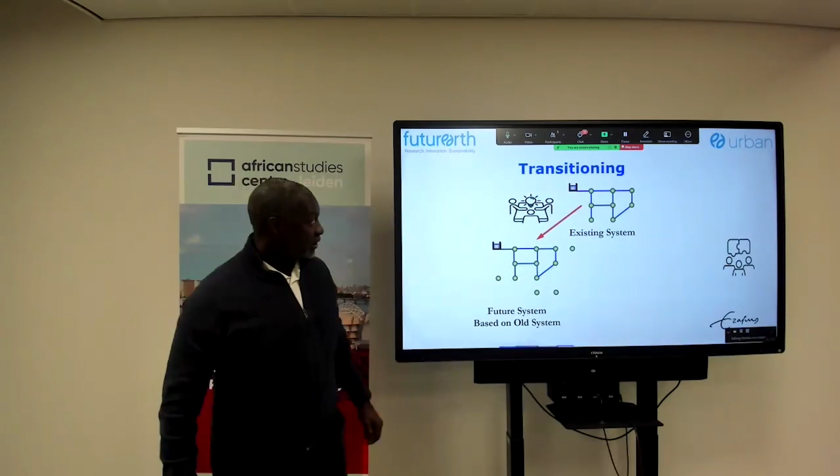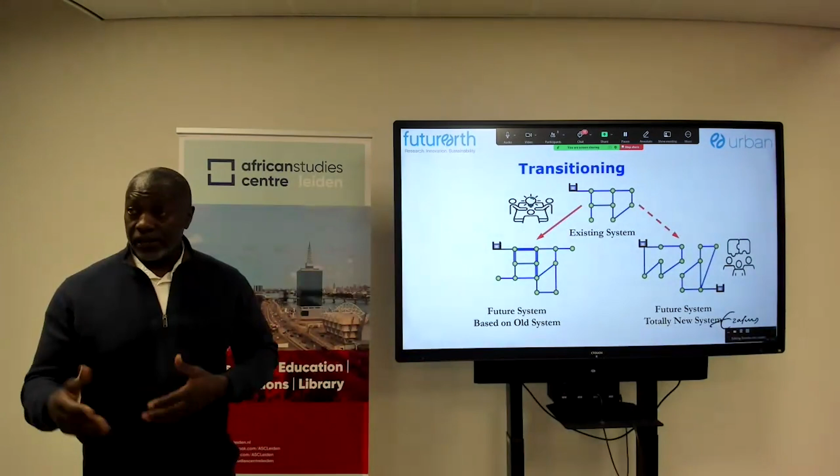So it's highly centralized, but you can continue doing that in the future by building on the existing old system, but we know that it's not happening at the pace that we need. Or you could break the system a little bit and decentralize. It means you localize the responses, you localize the opportunities, and you start working around the materialities that could be changed or even substituted.

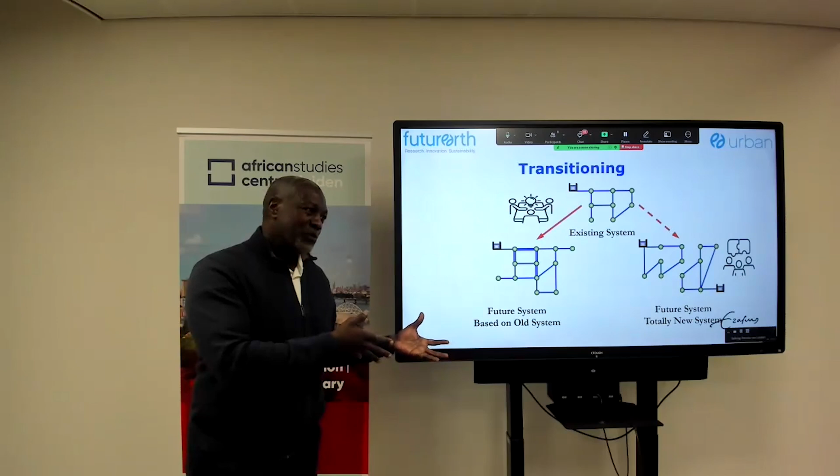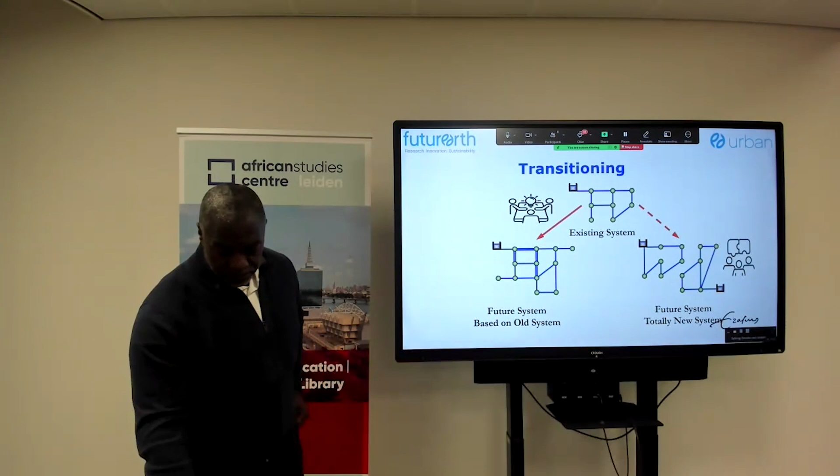So in some situations, there's a possibility to move away from concrete and steel in terms of sewage treatment, to nature-based, wetland-based management of waste. If you have a manageable system that is not highly centralized, then those possibilities can be explored, the feasibility analysis can be conducted, and then the investment opportunities could be identified. So future systems need to be looking like that. But it doesn't mean only that.

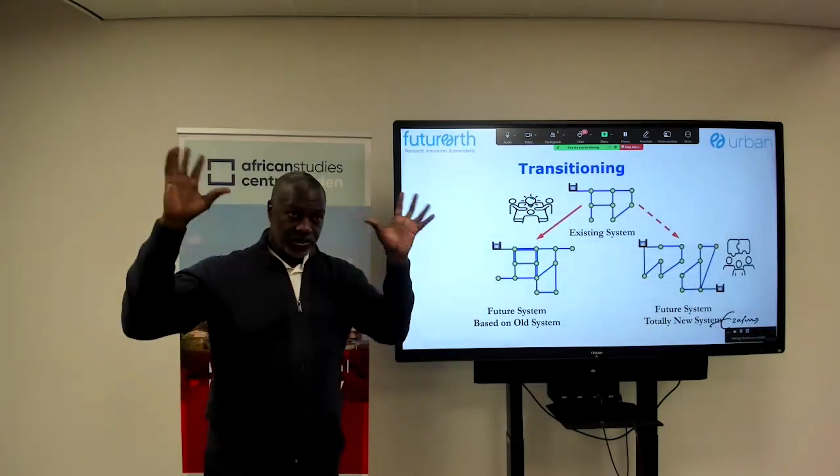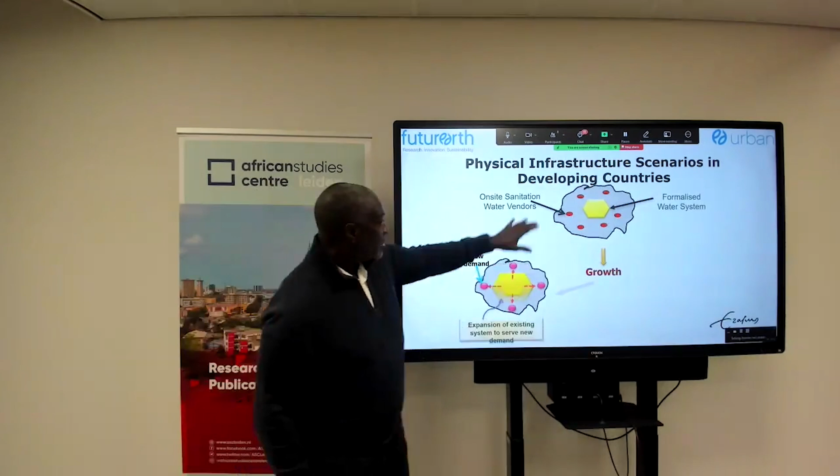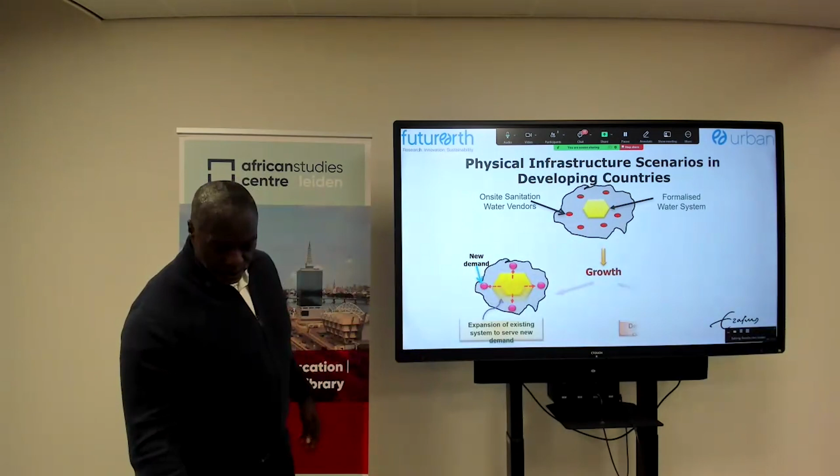There could also be situations in old, rapidly established and rapidly growing cities. This is still relevant, but if we piggybacked with that in the expansion areas, which is urban, then it might make sense to integrate through that element. Other systems could also be thought of this way. So you have on-site sanitation vendors, formalized water systems, but with the growth happening beyond the jurisdictions, do you expand on existing systems or create subsystems around it and eventually network them? All these are scenarios.

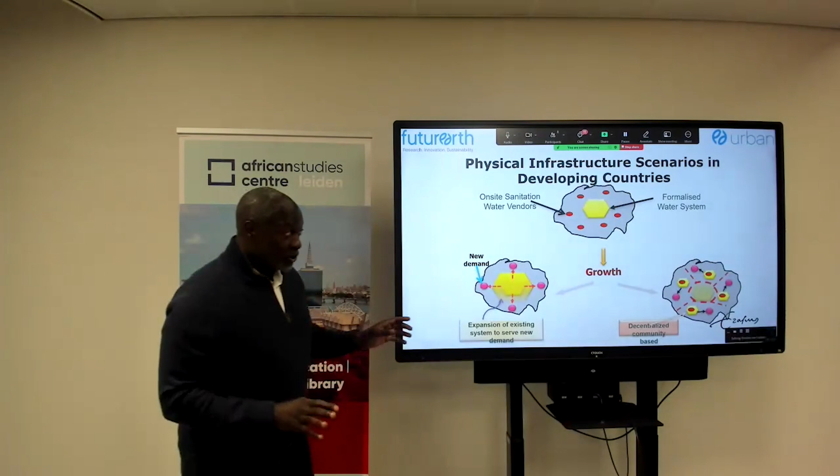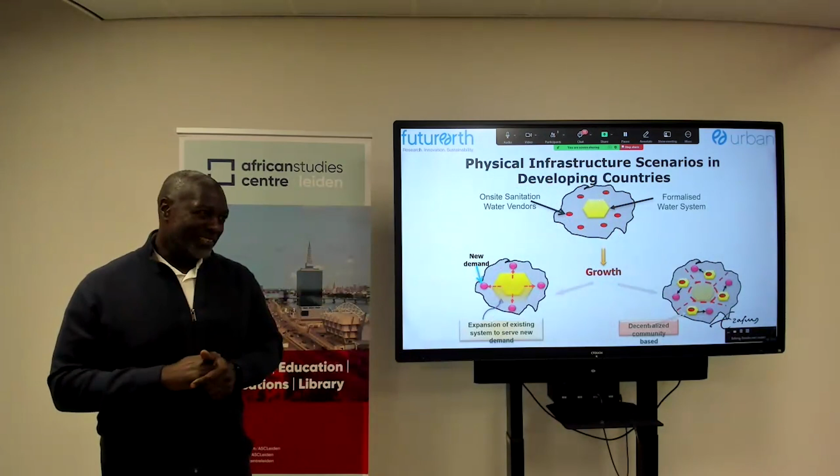It doesn't mean it should be worked out this way. In some situations, you might need only 2 of these and not 4 or 5, and that depends on the context. That pushes back on the toolbox I talked about earlier, because the toolbox pushes this: expand on existing system or design new systems. Now the word in sanitation is decentralized sanitation system, but they're still highly networked and huge, requiring huge investments as well. So that is an example.

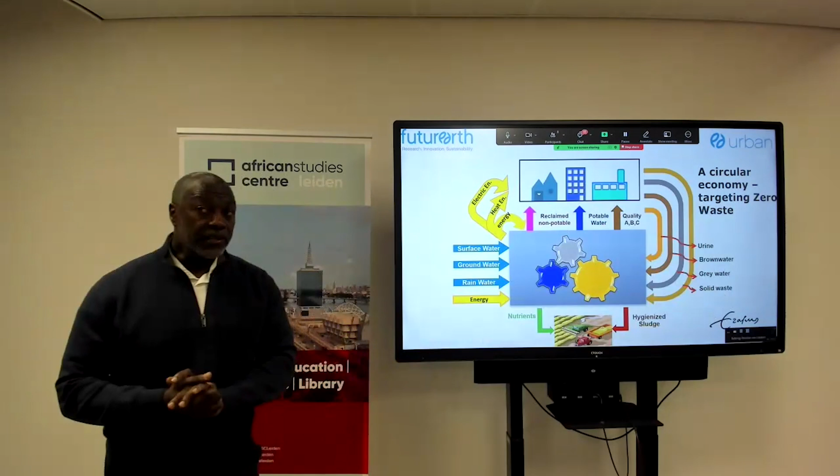There is a lot of opportunity related to the circular economy, by tapping materials from the waste and other opportunities - surface water, groundwater, rainwater, or energy - and then you reclaim and recycle those materials, whether solid or liquid, and they come back into the system, sometimes as hygienized sludge that could be utilized for agricultural production. So many examples, but again, they're disparate.

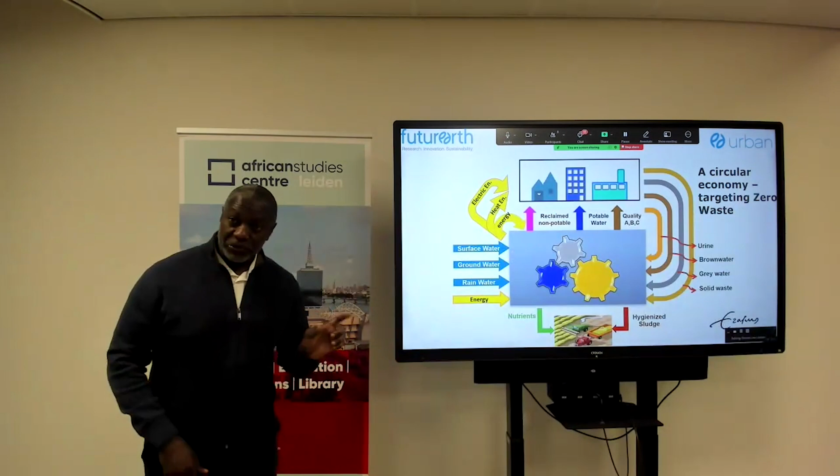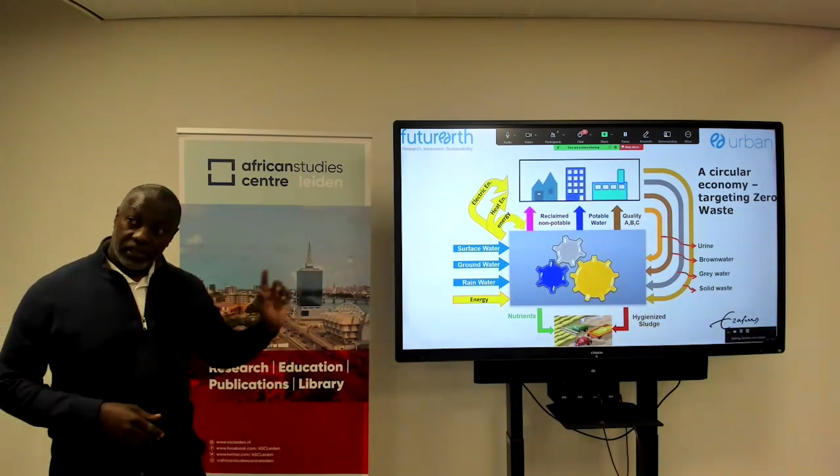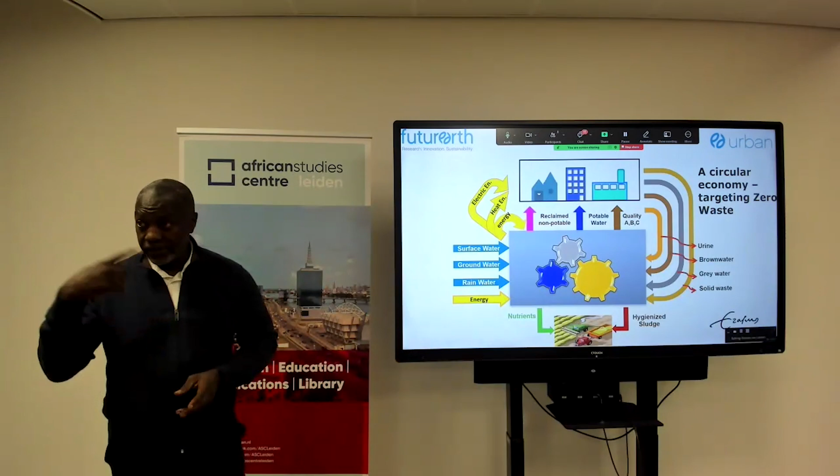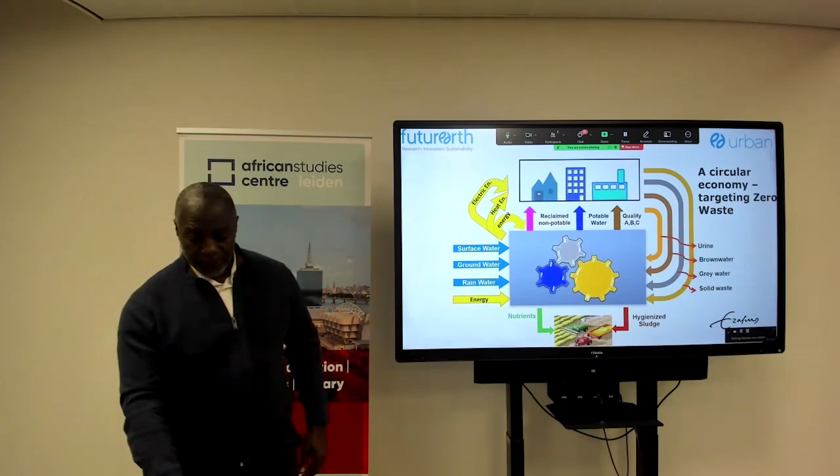If you go to Durban, they are doing the capture of nutrients from sewage coming off the pipeline network. In Kampala, they are now testing - I think they've done about 4 or 5 tests - tapping beneath the landfill to capture methane, which unfortunately a couple of months ago partly collapsed and killed people. So that has stalled a little bit, but there's been discussion about how to capture the methane from this landfill and utilize it for something else, maybe generation of electricity uploaded onto the centralized grid. So there are all these opportunities that have not been explored, yet they could offer a lot of economic opportunities, possibilities for coverage, improved coverage, affordability, and access.

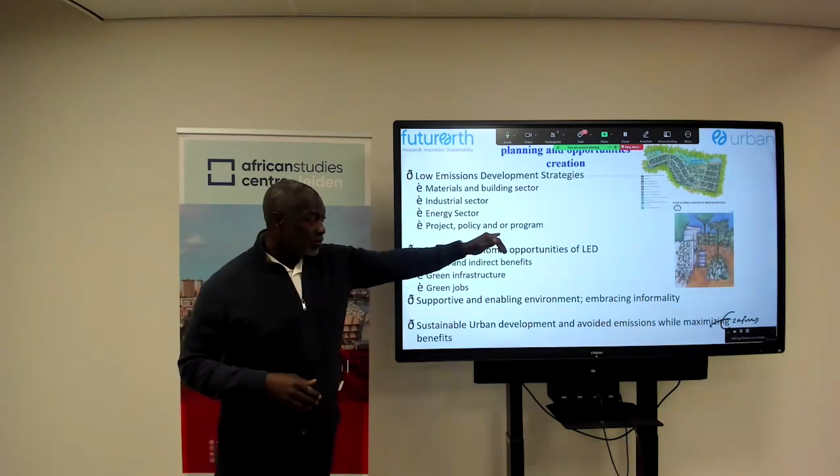And if you're going to develop the cities or urban areas, then we have to think low emissions development, and again, a repetition of the 4 sectors that require transition: energy, materials, industry, but also the project, policy, or program. Do you go for project or policy or program? And the projectization has been critiqued. It looks like there has to be a program in the urban areas in order to do that.

There's been a trial in several cities in several countries. Kenya is a good example that comes to mind right now, where the new structure of decentralization of governance has created the whole county government for the city, and the boundaries were adjusted a little bit, to allow planning on that urban area in that context, including a little bit of the peri-urban areas. So that gives room to think about integrated systems.

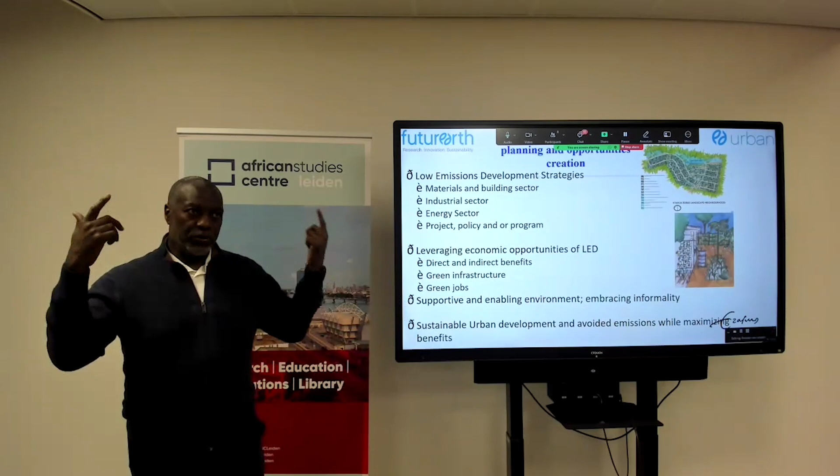So the rivers I talked about used to go beyond the Nairobi City Council. But now, because they are part of the county, you can do upstream, downstream restoration. Therefore, focusing on only a few areas along the river is not good enough if where the problem comes from, nothing is being done. That's the integration we're talking about - spatial, but also temporal integration.

The benefits from that could be in the form of peri-urban agriculture or even forestry, which could provide jobs, improve green infrastructure, support ambient air quality improvement, and translate into better health, meaning minimization of cost and health impacts.

When it comes to health, path dependencies are also very strong. Sustainable development is not a policy tick box thing. It has to be embedded in all these possible solutions, disruptive or otherwise, but integrated in a way that they complement each other. So here are some examples from theory to practice.

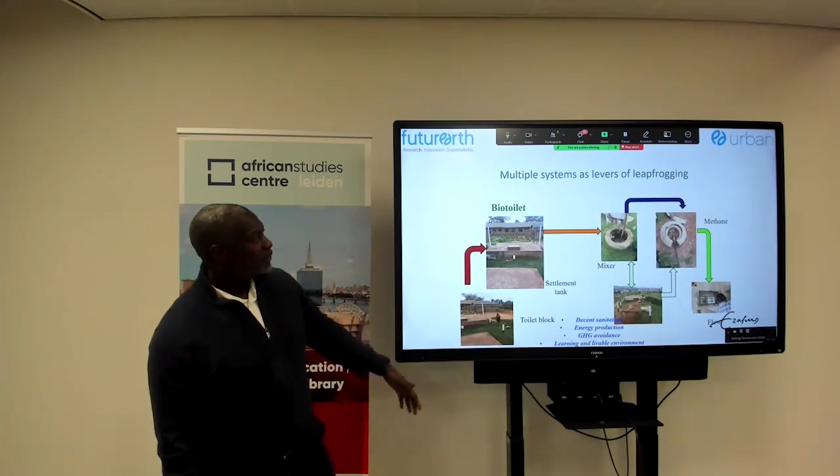This is an example in Kampala of the school energy project, tapping energy from the toilets and latrines in a primary school. This was around 2013-2014, and it started as just one model school with one model bio toilet. But now there are over 100 constructed in all public schools.

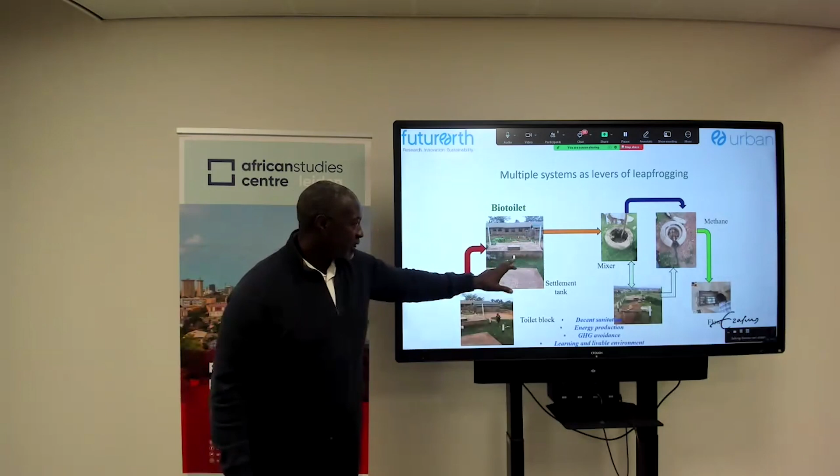Why? Because the toilet block is there. This is a settlement tank, nicely piped, and then the mixer, and then the digester. The methane is tapped, and then it goes to the kitchen.

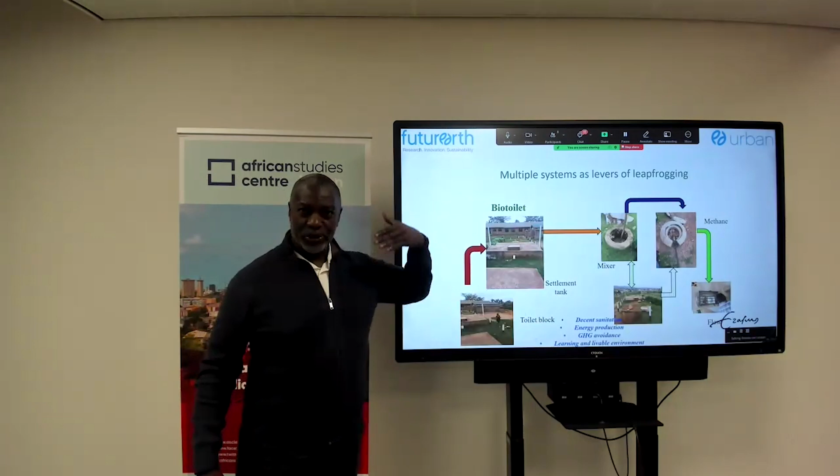That reduced the number of trucks of wood fuel brought to cook food in that primary school from around 7 to 3, and over time even reduced it to 1. So this is a workable off-grid solution.

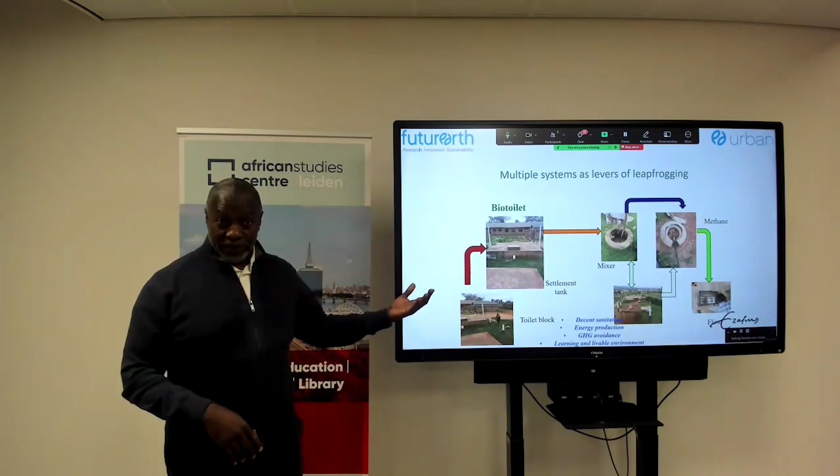As I said, from one school around that time to over 100 now, this translates into emissions avoided and deforestation avoided. If it could be popularized, it is different from a highly centralized, highly networked sewage treatment plant.

What's also interesting is that because schools break off for holiday—in Uganda they can break for maybe 3 weeks minimum, sometimes a month or two—the teachers sleeping on the school compound would have problems with energy for cooking. So nearby people, who often don't have good sanitation, are encouraged to use this facility so that the feeder continues, which provides a little enhancement of life for those people.

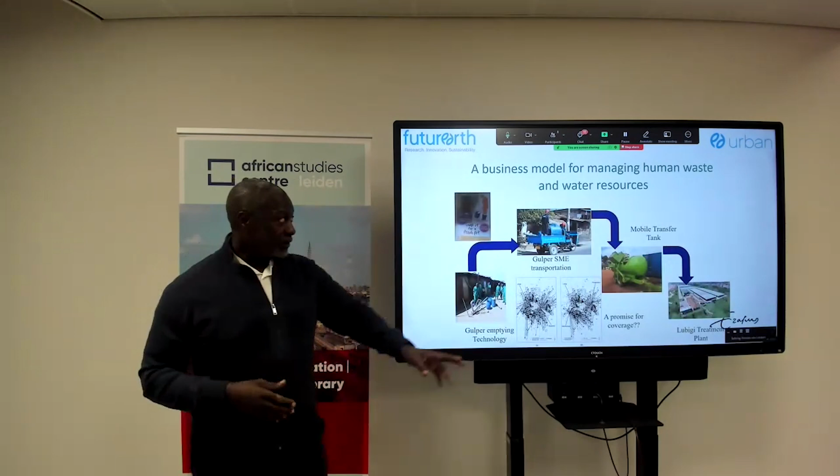Another approach to managing human waste, also off the grid, has a business model around a technology called Gulper—a vacuum pump with tanks, 200 liter tanks. The boys who operate this are called the Gulper boys, and they organize themselves as a company.

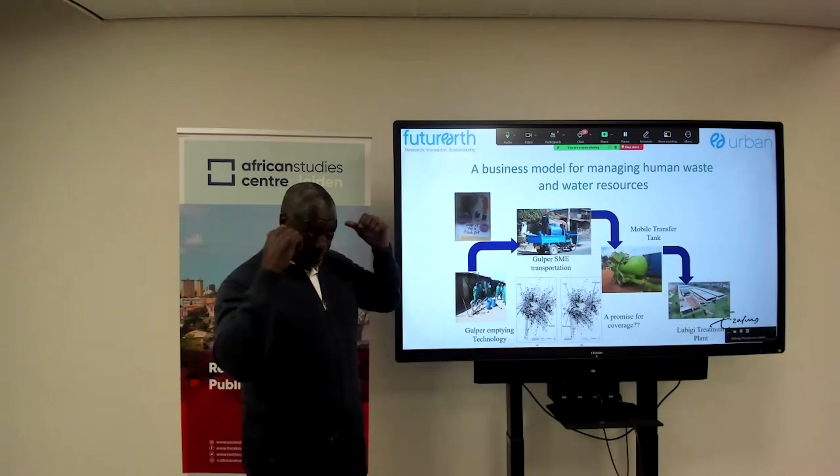This isn't only happening in Kampala—it's also evolving in Lagos, Nigeria, supported by Water for People. And this is how coverage would look like for those services.

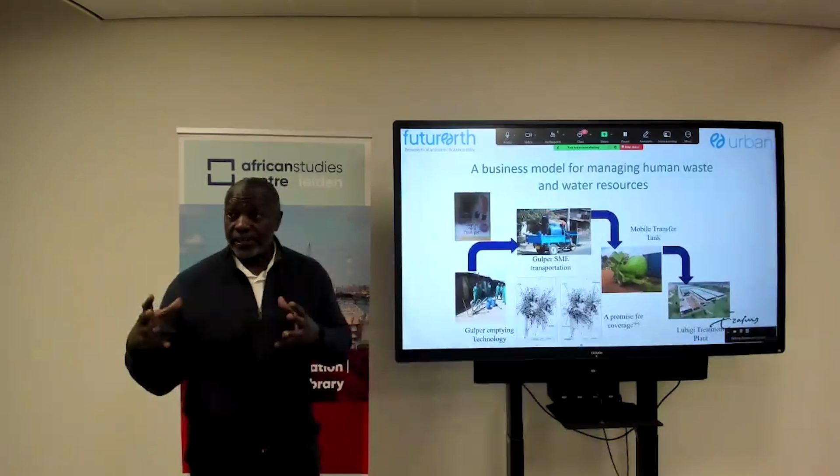Now there are many other detailed technicalities associated with this. One: are the pit latrines reusable once emptied? What about the costs? So the Kampala Capital City Authority designed minimalist standards for latrines using three principles: emptyable, cleanable, and reusable—because most latrines currently are just holes dug into the ground, and when emptied they become weak and often collapse.

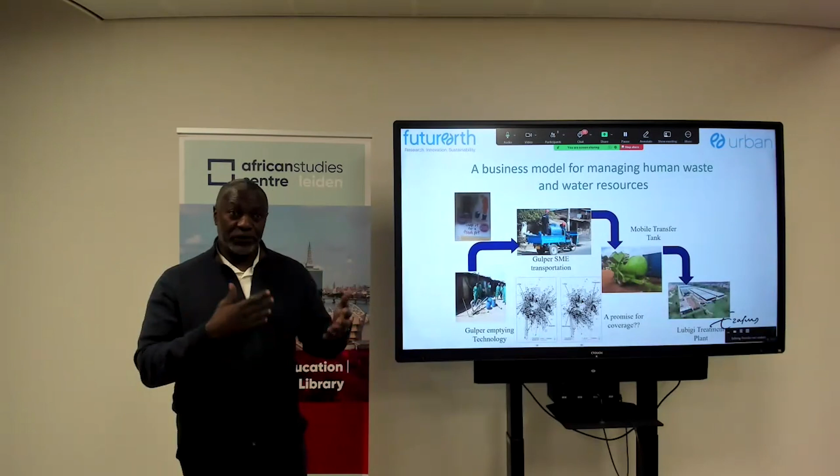But if you design it with support in terms of bricks and the like, it becomes reusable, because then you can empty almost 100% and you don't need to dig another hole elsewhere. This integration of governance with technological or disruptive innovative solutions is emerging but has not yet been popularized.

Another area is municipal solid waste. There are many possibilities emerging, from dumping anywhere, to sorting, to manufacturing energy briquettes which are then marketed. The Kampala Capital City Authority adopted this and popularized the use of these energy briquettes—there are different models and types manufactured, and they were popularized in public markets, especially those involving cooked food vending.

So they popularized that, and it has a backward linkage with the communities where the energy briquettes come from, because there is a sustainable pathway or value chain that provides income to those people.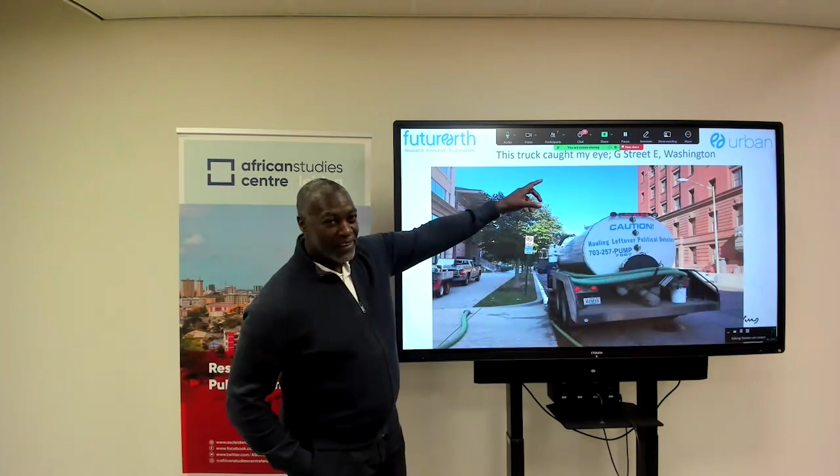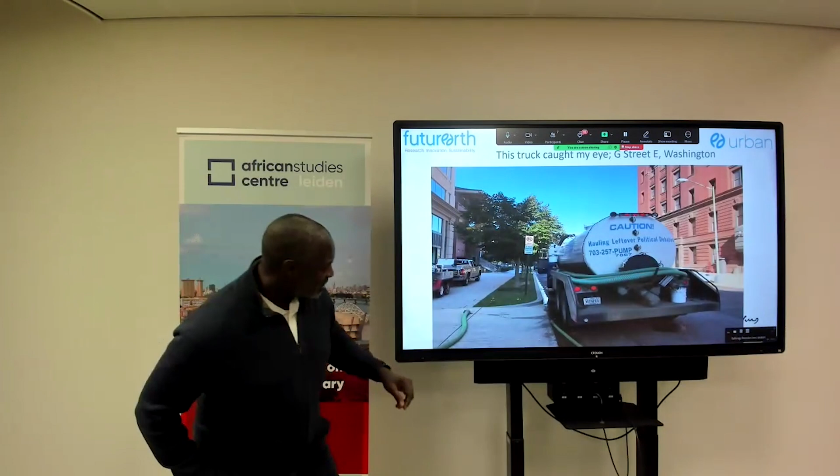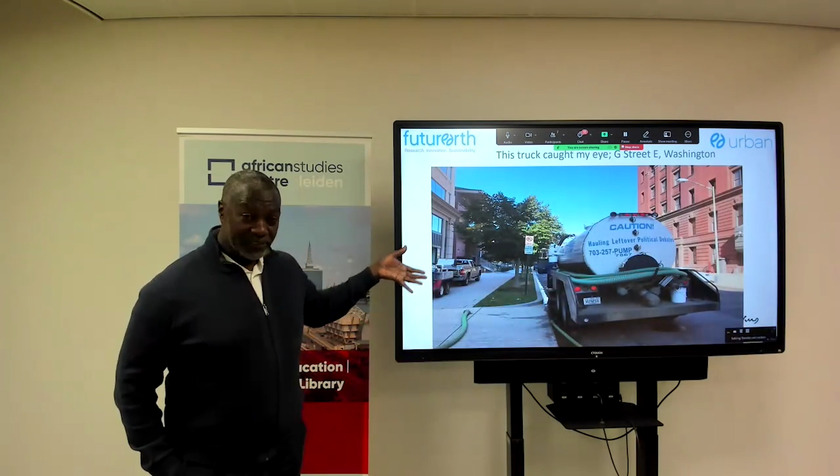And I end this set of examples with this picture. I don't know whether you recognize it. I took it in 2017 in Washington, on G Street East. I was walking to office, and then I saw this - the government printer of the United States. I was walking to office in that direction, and I said, okay, what is this? And then there's their pipes, and what caught my eye was hauling leftover political debates. So they were actually emptying whatever it is, septic tank or toilet, of the government printer of the United States with a cesspool emptier. This is an off-grid system.

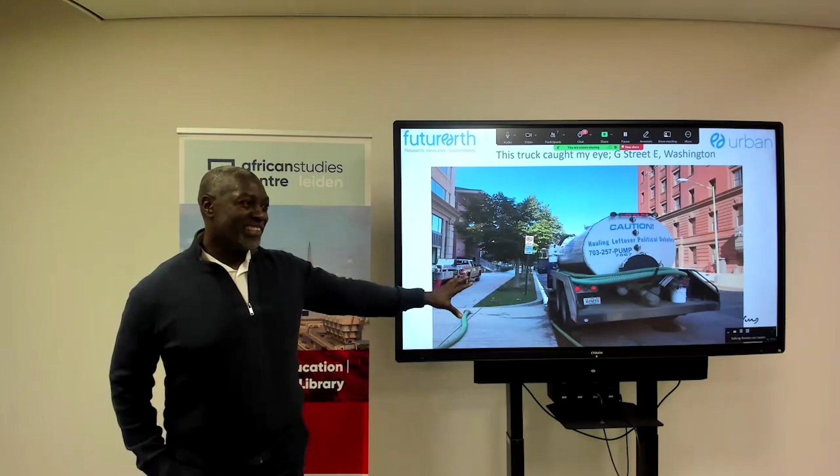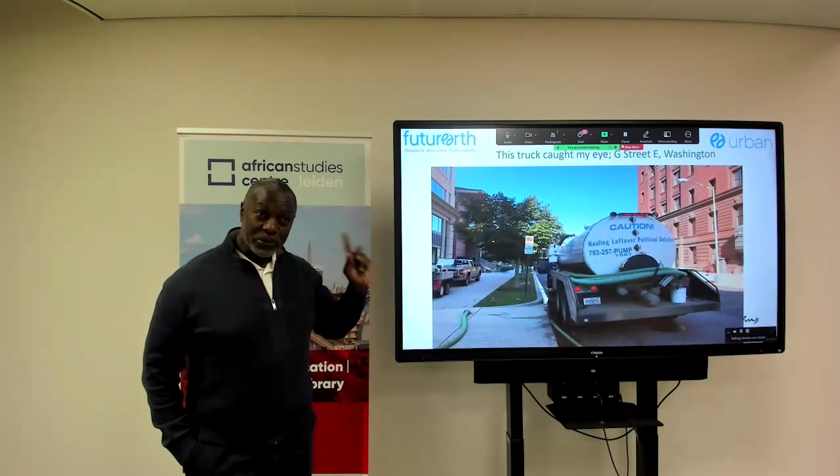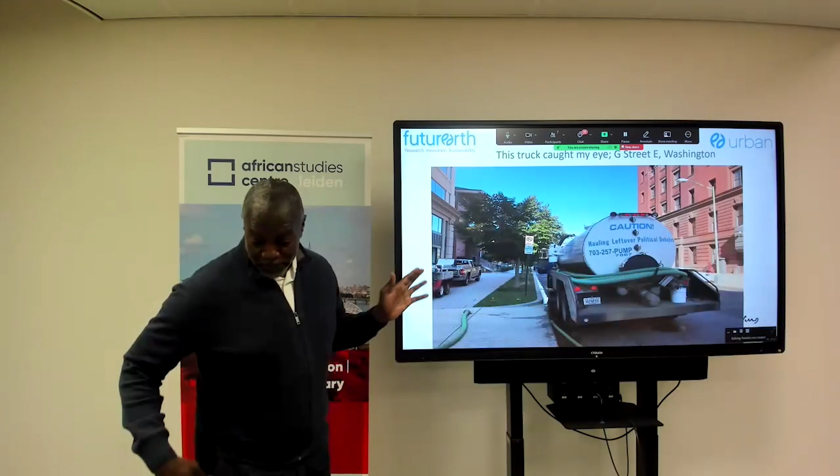But the financial architecture in Africa still pushes centralized and highly networked systems. That was the other reason I took it - not only the politics being overhauled after those debates, but that it is an off-grid system. It means there's a possibility to use off-grid systems as standalone, but also off-grid systems as complementary to centralized networks. A good example that if it happens elsewhere, it can also happen in different ways.

And then the last example has to do with urban expansion and anticipation of land use competition. There is a publication by Karen and others, Annette and myself, that shows anticipation of resource consumption and competition around urban areas. This is the example I want to use to illustrate urban versus city - the competition between urban and agriculture, forestry, and biofuels is intense. Urban and agriculture, and urban and forestry, is quite intense. And we see it here.

And this is not only Kampala - we did it at even continental level, and it was showing in many of the cities, for example Banjul, and around some of the big cities in Nigeria, Ibadan, Ife, and the like. The competition between urban and agricultural land is very intense, and that leads to fragmentation.

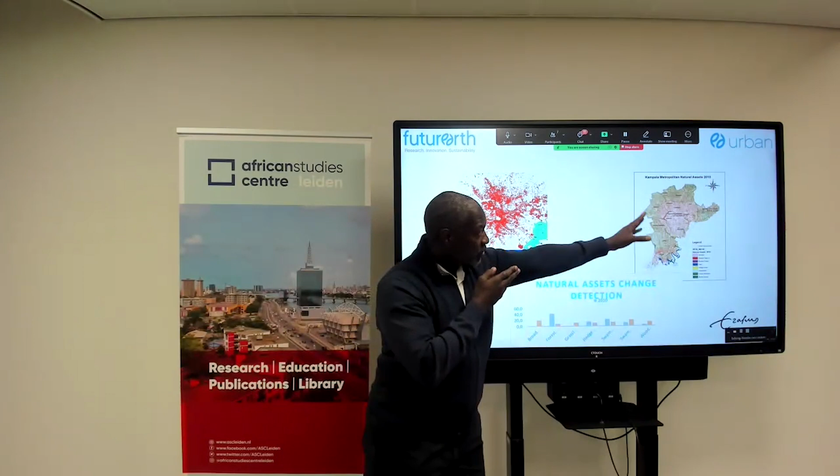Fragmentation in this map shows the dark areas - brown, orange, whatever. White is totally built up, so roof area. Brown is partially built up, and green is the rest. You can see the intensity of competition in the center of that.

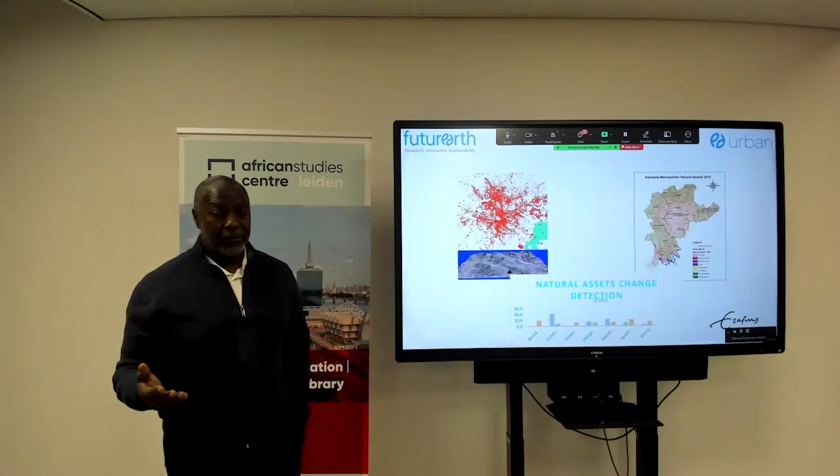Now this is where the concept of the city of Kampala is, that boundary. But urban extends beyond that boundary, so you can see the brown reddish areas are outside that boundary. It means urban goes beyond the jurisdiction. If you're going to plan, you need to consider urban more than city, but you have to work with the nearby jurisdictions - those could be municipalities or cities, or whatever. They could also be rural sub-counties, as in some countries they are called, or municipalities in Accra, or provinces.

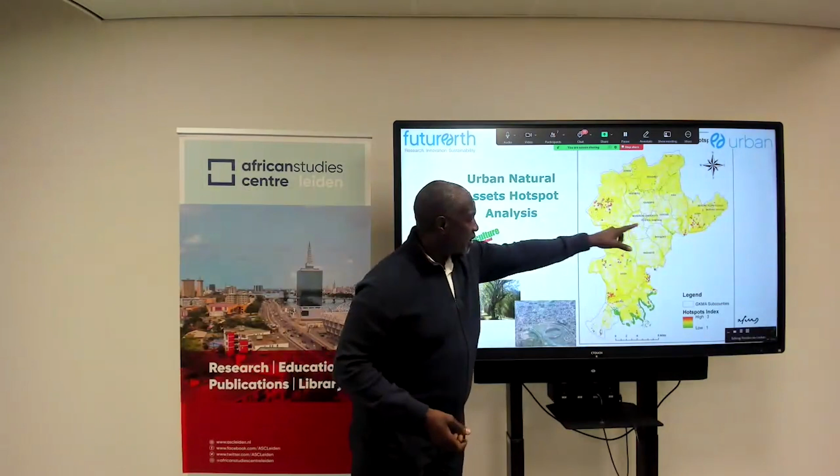You need to work with them in order to not control urban growth, but manage urban growth in a way that is beneficial for the entire population and the region, in terms of ecosystem, but also opportunities for people and creating jobs. So the natural assets are reducing, and at the very coarse scale of the image analysis, the hotspots in the surrounding areas, in red, are those areas which are really threatened by urbanization - through settlement, construction, but also agriculture.

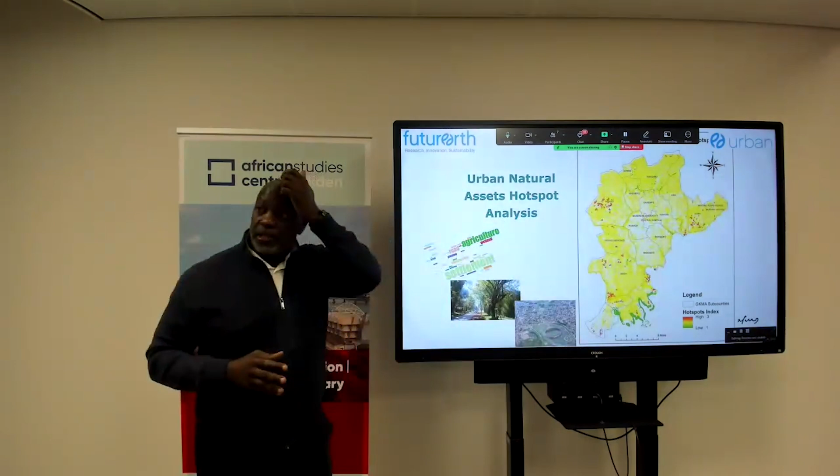In this region, there are quite a number of rainforests, and therefore expansion of agriculture into the rainforest is considered to be a competition that is also increasing the number of hotspots around the region.

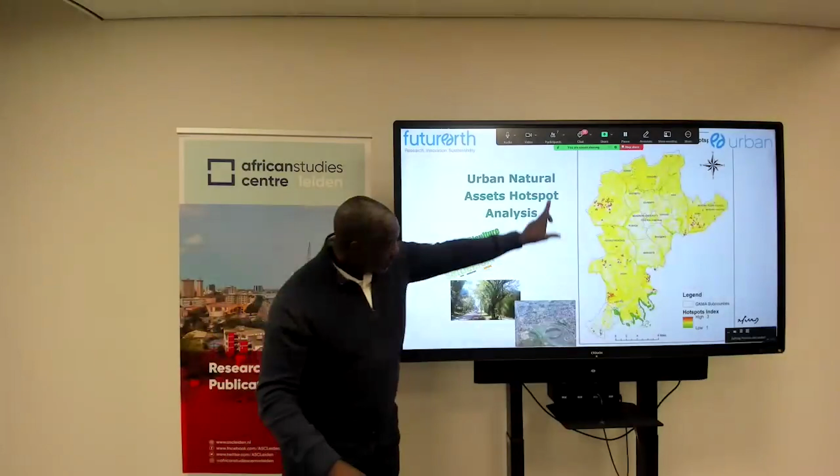If you zoom in further into the boundary, with the urban development around it and high resolution satellite imagery, you can start to see the level of fragmentation of ecosystems. That's why I talk about ecosystem restoration more than just green and blue infrastructure.

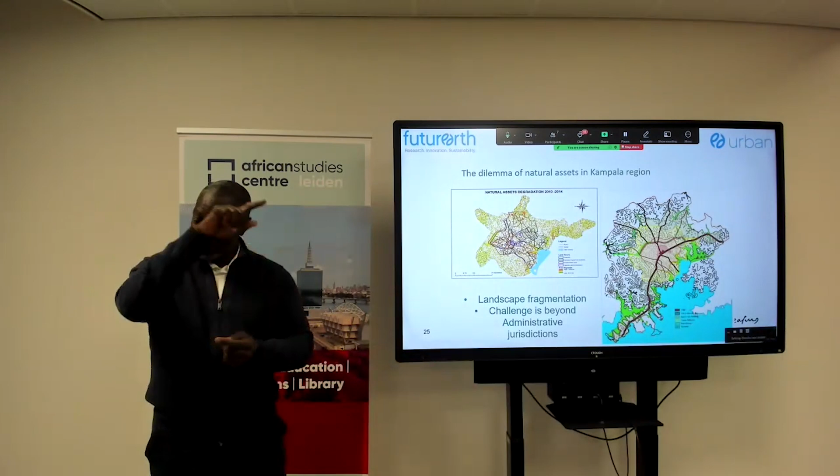You can see that the plan for the future of this region is going to be reliant on networked infrastructure, highways through and around, the circular roads or ring roads. They want to construct a second ring road, and in the plan there's even a third ring road. In another plan, there's also an idea of a bridge to connect this part through that bay.

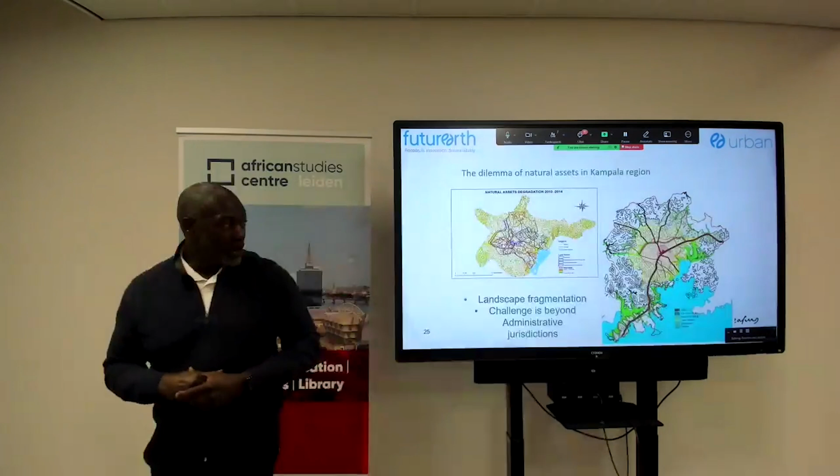So fragmentation is real, but fragmentation comes at a cost. There are opportunities, even if you're fragmenting the landscape, by restoring some patches of the ecosystem in those landscapes.

But the jurisdictional and administrative problem becomes very clear. The contestation between benefits sought by the private sector and the social perspective is also very important to think about. There are certain things the private sector feels they should go out for that are not what the social perspective would be looking out for. This comes to social responsibility, environmental care, and that translates into the different stakeholders that need to be addressed and consulted if you're going to plan for this competition of land use.

They also have to be very flexible, because we see that flexibility happening in many cities in Africa. We also have to really plan, support, and invest in alternative solutions, whether in energy, waste, water, or road infrastructure - decentralized, multi-nuclear systems. These are things we have to work on, but the context matters a lot.

There's so much talk about informality, but it can also be thought of and looked at as an emerging sector rather than informal. It's not just a problem, the opportunity is there. Think about the energy briquettes - where do they come from? Think about the bio-toilet in the school close to an unplanned neighborhood. It's an emerging sector.